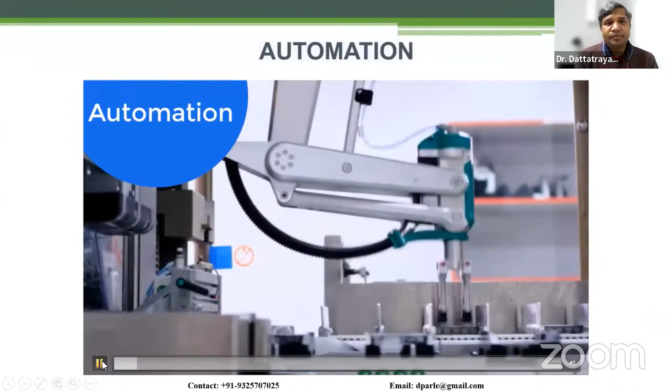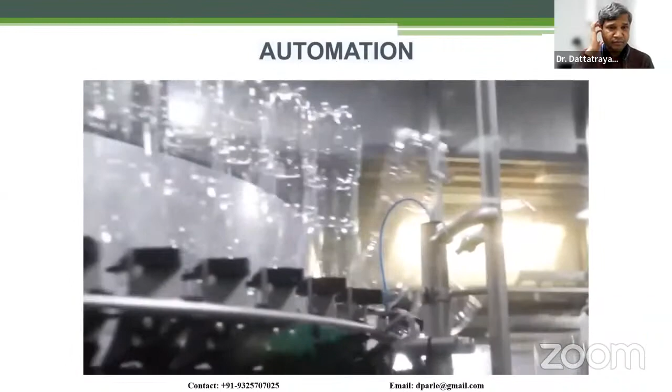These days, many industries are automated. Their whole process is working automatically with minimum human intervention, and in the days to come it will become more and more developed. Just take a Pepsi factory as an example. From preparing the compound or liquid to filling it in bottles and packing, every stage is automated. No need for humans to measure the quantity of liquid, capping and labeling the bottles, and counting the bottles. All tasks are done automatically. But how is it possible?

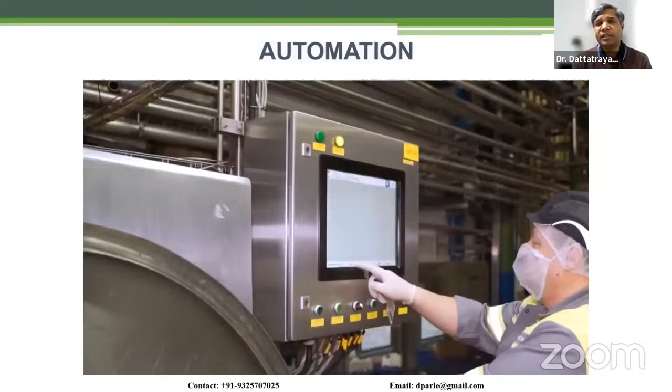So this is what we'll see - what is this automation, how it happens, how people do it, and how we did some of these automations. So what is automation? If you trace back the word, it's derived from the Greek 'automatos', meaning self-moving. Auto means self, matic means moving. So automation - if you have seen the earlier Pepsi factory example, I'll take you through another factory later.

And if you see some of those factories, they definitely use a lot of automation where the production is huge. So automation happens - maybe when you attended my Industry 4.0 session, I talked about Industry 2.0, where mass production, assembly line, that was more of a mechanical automation. Over the period of time, in Industry 3.0, electronics and computers started coming into the picture. That's where automation is the use of technology and machines to perform tasks or processes without human intervention.

So that's where automation started growing a lot in the era of Industry 3.0. In Industry 2.0, it was not that way, because the electronics technology part was not that predominant, so whatever automation could be done was using mechanical systems. If you remember, even today in India, in some places you will see that water level tank - it is operated using a mechanical control system. A ball is there, and as water fills up, it all cuts off, right? So that kind of automation was very predominant in Industry 2.0, but in Industry 3.0, the automation which combines technology and machines together started coming into the picture, and that's what we are going to talk about today.

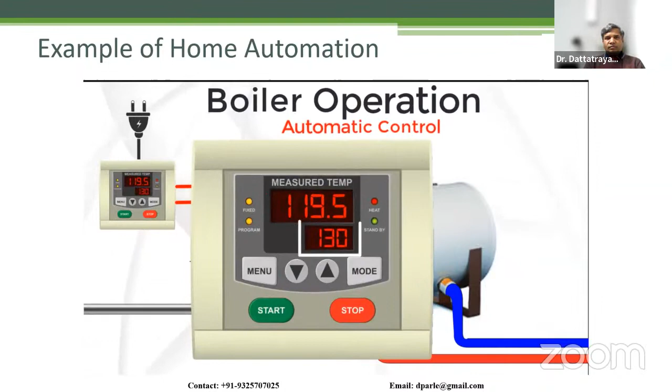Now see automatic control - the temperature gauge is replaced with a temperature transducer, the handle valve is replaced with a control valve, and the human is replaced with a temperature controller. Yes, the human is replaced with a temperature controller, and they are all connected through wire and power supply. The required temperature is already set at the temperature controller - that's called SV, meaning set value - and the temperature transducer sends a signal of current temperature, called PV, meaning process value. When PV reaches the SV value, a signal transmits to the control valve, and the valve closes automatically. So the same action has been done without humans.

So the human is in a safe place, there's no chance of errors, the temperature will be accurate, and it can handle a large number of valves. In UK homes, boilers of this kind are almost in every home because the outside temperature is very, very cold, and every home will always have two taps, hot and cold - and you always need hot water, because at least in winter you can't use cold water. So that is the situation where you use this kind of automatic control or home automation system.

Just look at a boiler - so what are the types of automation, and where are they used in the industry? There are types according to the kind of features they implement, and types according to where they are used. As per application: industrial automation, service automation, home automation, business process automation, transport automation, hospital automation, or logistic automation - there can be many types based on application. But typically, based on functions and features, it can be fixed automation, programmable automation, flexible automation, robotic automation, cognitive automation, and autonomous automation.

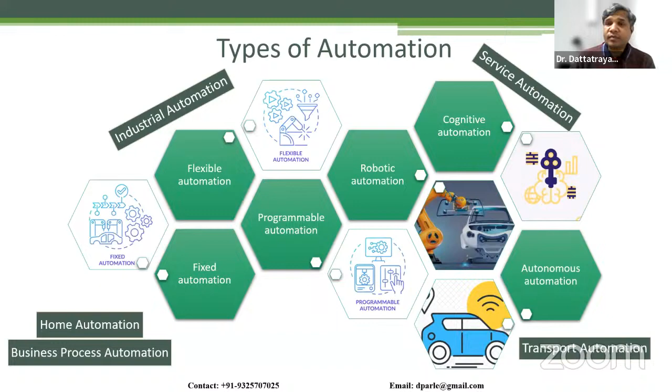As basic, it can be a fixed automation, one end, and another end, that's autonomous automation. So boiler is a fixed automation, or it can be converted into a programmable automation. Or the autonomous vehicle I explained on Monday is a state-of-the-art, complex transport automation. That autonomous automation need not always be in transport. There can be many autonomous operations in industry or any other field. When in a traditional automation you embed cognitive features and combine together these basic automations, either fixed or programmable, it will lead to autonomous, or doing it more autonomously as if a human is doing it. So let's see each one of it.

Before going into these details, I want to take you through one of the most state-of-the-art automated factories which I have visited. This video is from SKF India, Bangalore, but in 2017 I was in Germany and had a chance to visit SKF because we were working for them designing bearings. I also had a chance to visit this Bangalore factory. When I first visited the German factory, I realized the level of automation they use and why they use it. It is amazing to see. So I'll just play this video and then give more insight into it.

SKF Bengaluru to reach its goal of 0 defects.

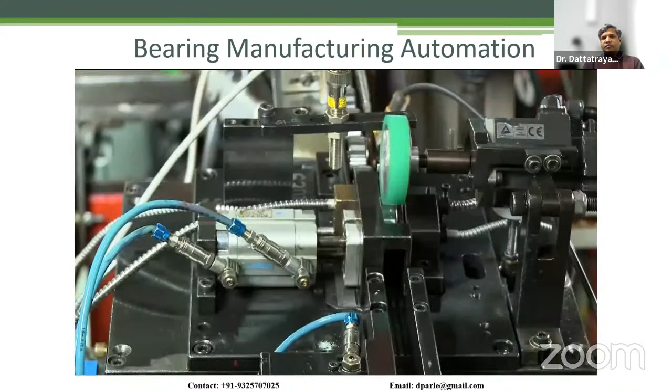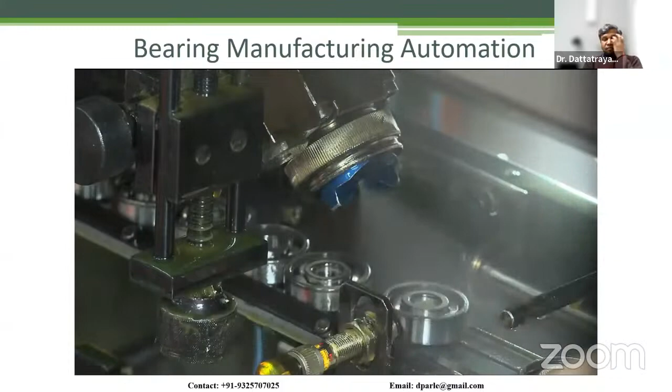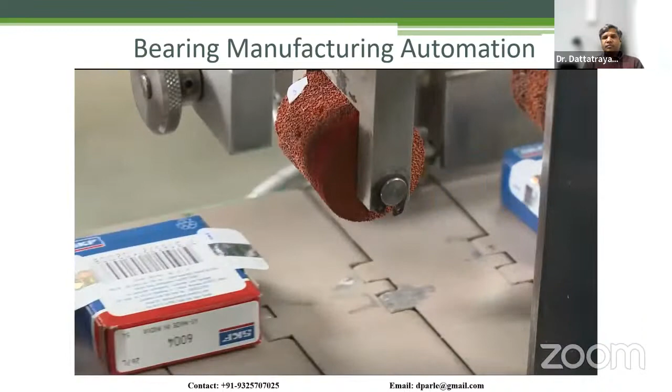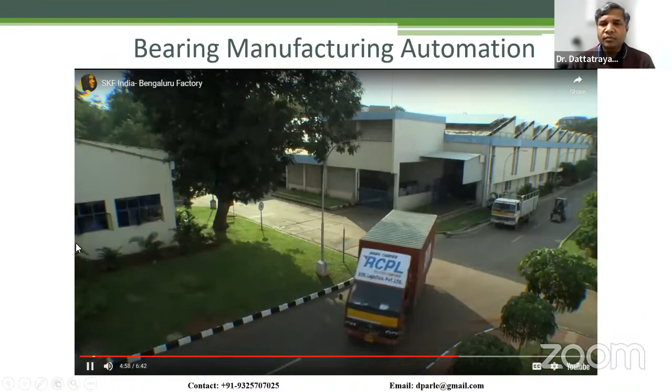The enterprise resource planning - so you can see the kind of automation they use.

So I have seen the factory, and you have seen the shop floor. Very few people would be there. In this video you can see a few more, but back in Germany, on one shop floor we had only a couple of guys who were just monitoring the machines or checking if something was going wrong. So from start to finish until packaging, everything is automated - assembly, greasing, packing in plastic, packing in boxes, packing in the big boxes. Everything is probably automated. It's amazing.

If you get a chance to visit, if you are in Pune, there's a similar automation factory there too. It's definitely worth seeing and understanding the kind of automation they do, the precision and accuracy, even their measurements and inspections - all activities are automated throughout. Only people are there to monitor the machines, monitor the settings, monitor if there's any problem in the line. The operators are not really doing any manufacturing-related activities, only inspection, monitoring, and surveillance. That's the kind of automation you will see in the industry - amazing to see and understand.

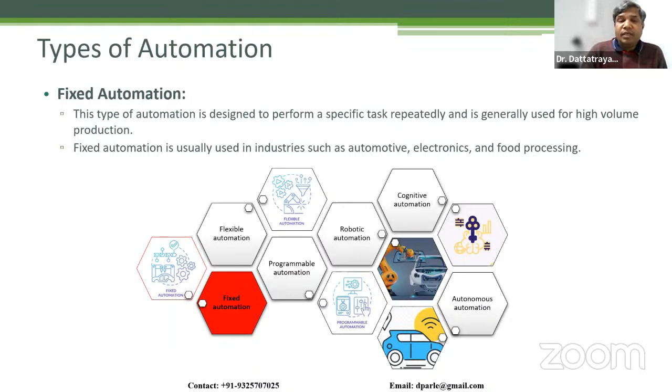Then there is a next level of automation. These are fundamental automations typically widely used in any industry.

That is where you will see programmable automation, which you can program or reprogram for a different purpose, not just fixed automation. The problem is if there is a slight variation in the product or operation, you can't use fixed automation; you'd have to build another one. But in programmable automation, you can do multiple tasks by reprogramming it. This is generally seen in manufacturing factories where tasks are frequently changed, so they set up automation that allows them to program and perform different tasks.

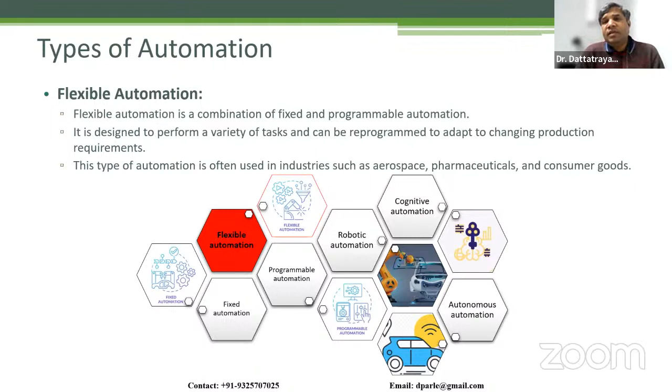The third fundamental automation is flexible automation, a combination of fixed and programmable. It is designed to perform a variety of tasks that can be reprogrammed or adapted to changing conditions or requirements. For example, if the diameter or height changes, it adapts to the changing requirements or task, and if the flow of operation changes, it can be reprogrammed. These are widely used in pharmaceutical, consumer goods, and many aerospace activities.

So fixed automation was definitely part of Industry 2.0, while programmable and flexible automation started coming into the early days of Industry 3.0. As Industry 3.0 matured with more use of computers, robotics, and electronic systems, robotic automation came into the picture.

Robotic automation involves the use of robots to perform various tasks that are either too dangerous or too repetitive for humans. For example, bearing manufacturing is very repetitive, maybe not too dangerous. But there can be too dangerous activities too, like heating of the bearing material, which is dangerous, or welding kind of operations, which are also dangerous.

So those kinds of operations are where robotic automation is certainly useful, or where it's highly repetitive. It can be used in a variety of applications like manufacturing, healthcare, logistics, everywhere. In logistics, definitely robots are used—you might have heard stories, and I've seen this myself, in Amazon warehouses.

Here is another example from our own factory. We call that factory 2050, which is part of our AMRC, one of the research centers - another branch, a manufacturing research center. It is completely highly robotic, everything is robotic, and we call it factory 2050, meaning probably the factories of 2050 would be completely robotic. And what should be done for that?

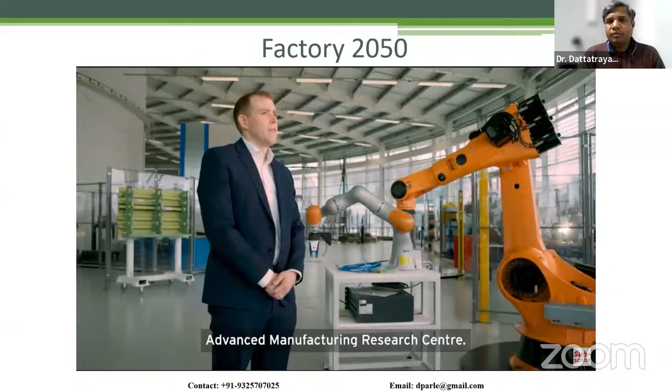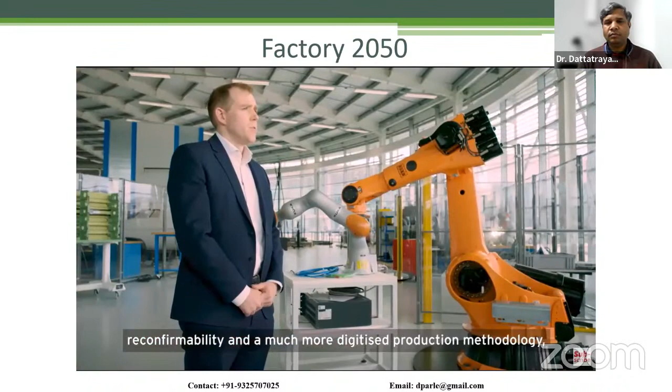I'm Ben Morgan, and I'm the Research Director at the Advanced Manufacturing Research Centre. Our directors back in 2013, 2014 were involved in a report for the government to understand what the future need for manufacturing was in the UK. The report concluded that there was a need for skills and to attract the right talent into the industry, and that manufacturing was heading towards a need for reconfigurability and a much more digitised production methodology. So Factory 2050 was really born out of that.

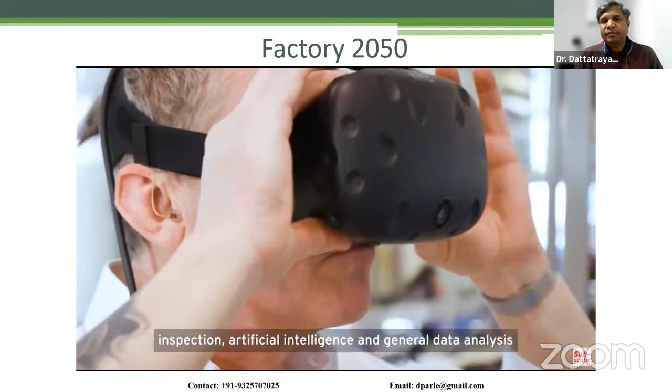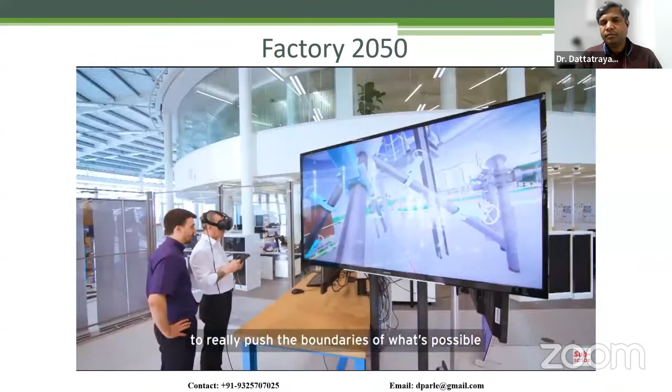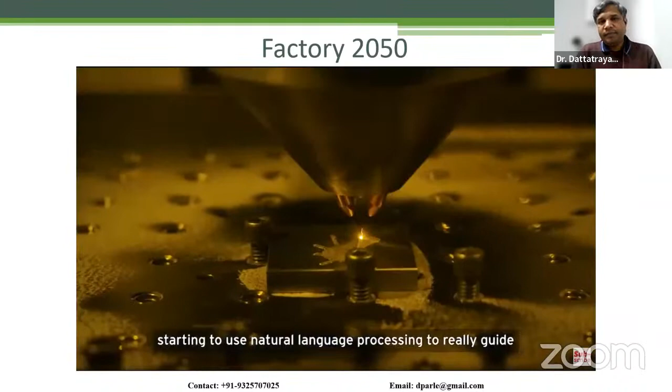One example of that is quality inspection, where we're starting to get figures back showing that AI is actually more responsive and more accurate than the human operator. You can see collaborative robotics, another application in maintenance, where we're starting to use natural language processing to really guide and aid the operator in their use of digital technologies.

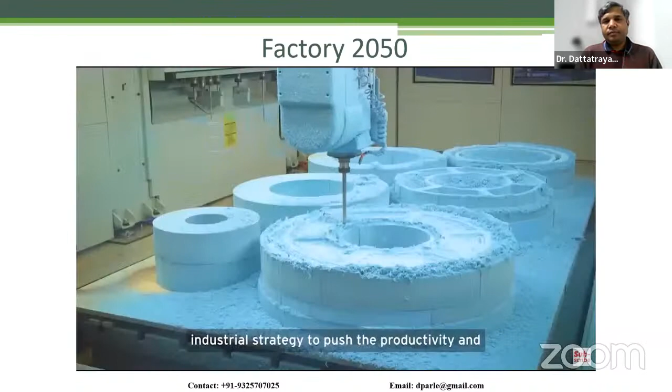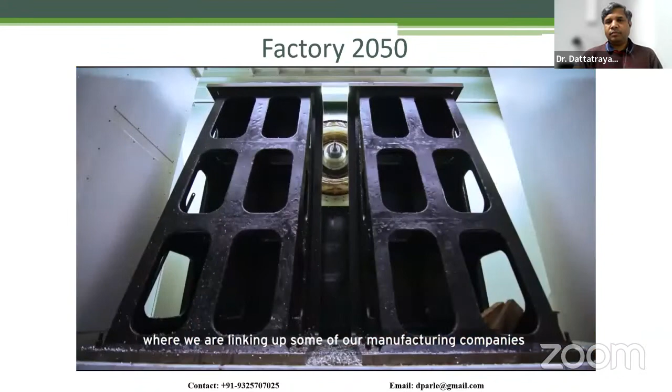There's been a huge drive by the UK government with industrial strategy to push the productivity and prosperity of the UK economy through manufacturing, and I think Factory 2050 has been a flagship in showing to the UK and the wider world what digital manufacturing can do. I think the next exciting thing for Factory 2050 is some of the work we're doing around digital meets manufacturing, where we are linking up some of our manufacturing companies and partners with small digital businesses in the region and nationally. What we're seeing is some of those smaller businesses have solutions and can act very, very quickly and solve some of our manufacturers' issues. I think that will be revolutionary for the UK going forward.

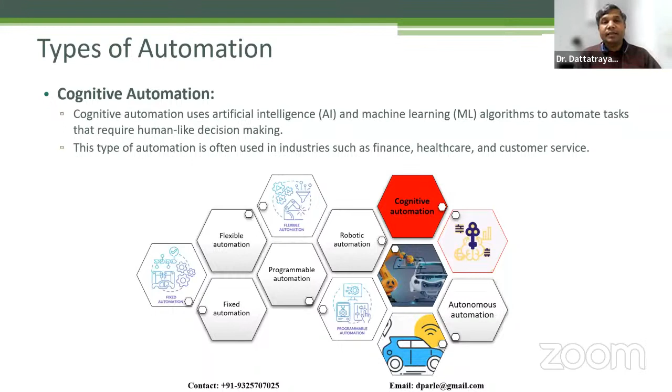So that's our Factory 2050, and it's completely robotic automation, probably augmented with cognitive automation. So what's cognitive automation? It uses AI and machine learning - I'll talk in detail a bit later about what AI is, what machine learning is, what deep learning is - to automate tasks that require human-like decision making. Rule-based automation is probably not cognitive, it's flexible but fixed and programmable - it's rule-based. A lot of robotics is also rule-based: you define certain rules to perform a task and it will do the task. But many tasks need human-like decision making, human-like reasoning, and that will come from artificial intelligence. And that is growing slowly.

This kind of cognitive automation, although growing in the factory and hardware side, is very popular today on the software side too, in many companies' IT departments like finance, healthcare, and customer service. You might have seen that when you go to a company's website, a chatbot appears - that's a type of automation for customer service. Or on finance websites, they tell you what your credit score should be, or which policy you should buy. All of that comes from cognitive automation, and you might see similar things on social platform companies. This is now being combined into our industrial or home automation, or factory level automation, to get better benefits.

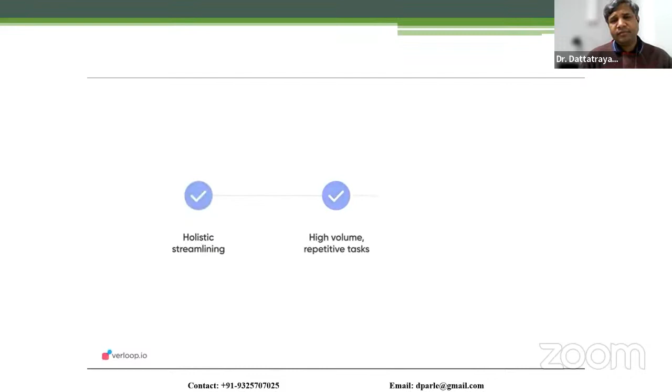So this is what I call a robotic cognitive automation program. What is intelligent automation? Simplicity is complexity resolved. Intelligent automation stands as a newfound way for you to streamline and optimize processes at different levels of your business through automation and cognitive capabilities. It is a three-way framework of technologies that bring high mobility and unison across teams: robotic process automation, business process automation, and artificial intelligence.

Robotic process automation allows you to emulate the way people perform back-end, high-volume processes, all through a set of defined instructions. These rules help the bot perform repetitive and time-consuming functions on its own. A few examples would be creating accounts, modifying customer information, automating customer refunds, and processing feedback and complaints. What's more interesting is that you can teach your task-based RPA system to correct or adapt its course based on its performance and dynamic conditions in the shortest time possible. This is truly what businesses such as yours can benefit from: accelerated efficiencies.

Business process automation, on the other hand, looks at a much larger picture. Imagine a company with process gaps across departments impeding it from performing to its full potential. There is a discord between worker onboarding, invoicing, supply chain, and retail. All of these departments are standalone but highly impacted by the way others function. BPA works at filling those process silos to form a coherent and sustainable business network.

RPA and BPA form the backbone of automation, but they are not cognitive - artificial intelligence is. It is the third component of what really makes automation intelligent and perceptive. With the help of machine learning and neural networks, AI decodes patterns and draws meaningful conclusions out of unstructured data. It is self-improving and requires minimal human support. With continuous training and deductive reasoning, it is able to evolve to become more human after each application. For example, with the help of sentiment analysis and natural language processing and understanding, conversational AI is able to pick up on the intent, tone, emotion, and even urgency to enable human-like customer support conversations.

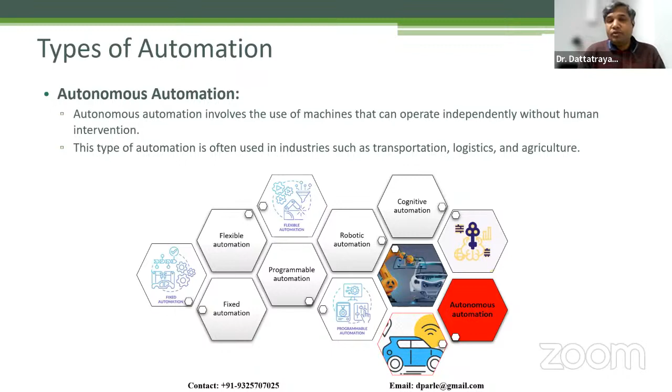Here is one example I was working on when I was at Wipro, collaborating with this company to help them with an autonomous vehicle. This is an autonomous vacuum cleaner. You might have seen people doing vacuuming manually, but imagine large spaces you want to do continuously, or countries like US, UK, or European countries where manpower is not there and is costlier than machines. In those situations, probably these kinds of autonomous intelligent machines would be useful.

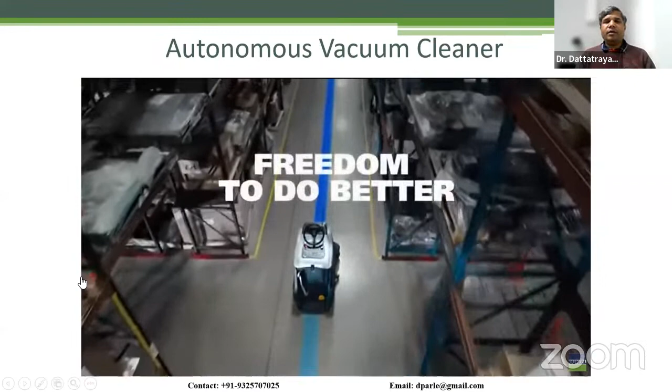So that is a kind of automation happening across the industries. There are different levels of automation happening. Just briefly, what is industrial automation? We already talked about what automation is - it's the same, but specific to the industrial application. It uses hardware and software control system devices or robots to operate or work in industrial processes, industrial setup, industrial operations, without a human operator.

So, benefits - some of this you already heard. Just to recap: it reduces cost, enhances quality, gives accurate results repeatably. Its communication is better, faster. You can do equipment monitoring. You can increase productivity. You can increase safety. You can have better working conditions, do predictive maintenance, corrective maintenance. You can trace back your production. Many benefits of automation over traditional manufacturing or traditional industrial operations.

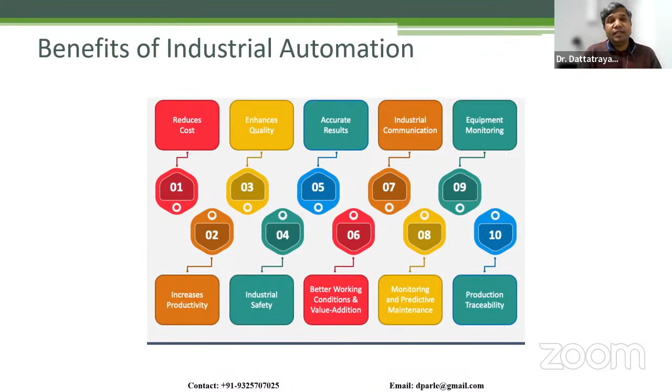So how are these automation systems built, what standard is typically used? ISA, International Society of Automation 95, is the standard used, which defines the fundamental hierarchical model for building automation systems or integrating enterprise and control systems. There are two things in automation: hardware, software, and your company, your process. That control system is connected to the enterprise system, and how it should be done - the guidelines are defined in ISA 95, and that helps people design the whole communication, and various models are given in the standard.

I'm going to explain here only the fundamental model and how it has now evolved in the changing world. It's a layered, pyramid-level, layered technology or business process model. It can be a functional model, it can be a technology model. I'll briefly explain this, and then you can refer to the ISA standard for more detailed understanding. So what exactly is the automation pyramid? It's a pictorial example of the different levels of automation.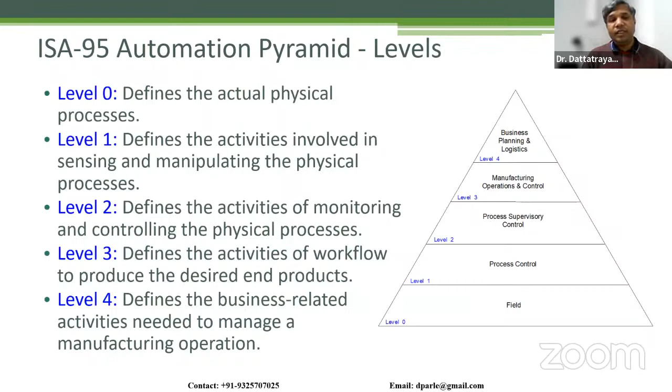So there are 5 levels of automation. Level 0 is the field level, where the actual process is happening. Level 1 is the process level, where you have to do sensing or manipulating of the physical process. Level 2 is controlling and supervising - the supervisory level, where you want to control, supervise, and monitor the activities. Level 3 involves defining workflows of activities to produce the desired results. Level 4 is the management business layer.

So this is briefly explained here.

These are the devices, actuators, and sensors that you see in the field or on the production floor. If you think of it this way, the field level is the production floor that does the physical work and monitoring - electric motors, hydraulic and pneumatic actuators to move machinery, proximity switches used to detect that movement or certain materials, and photoelectric switches that detect similar things, will all play a part in the field level.

The next level is referred to as the control level. This is where PLCs and PIDs come into play. The control level uses these devices to control and run the devices in the field level that actually do the physical work. They take in information from all of the sensors, switches, and other input devices to make decisions on what outputs to turn on to complete the programmed task.

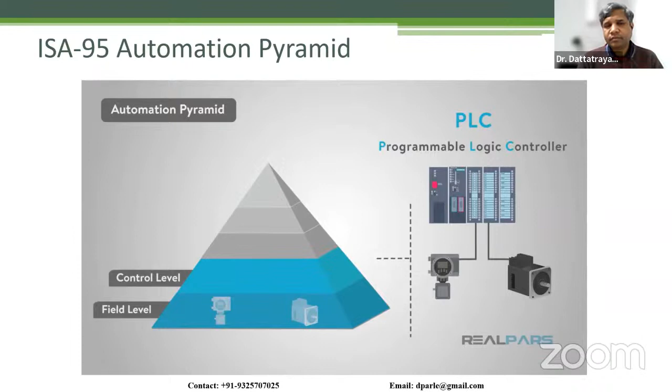A PID is usually integrated into the PLC and stands for proportional integral derivative. It's a controller that can keep a variable within a set of parameters.

A common example that you probably use every day is your cruise control. You set your cruise control to whatever speed you want, and the PID sensors and controller, the computer in the car, will tell it when to accelerate or decelerate according to the set speed.

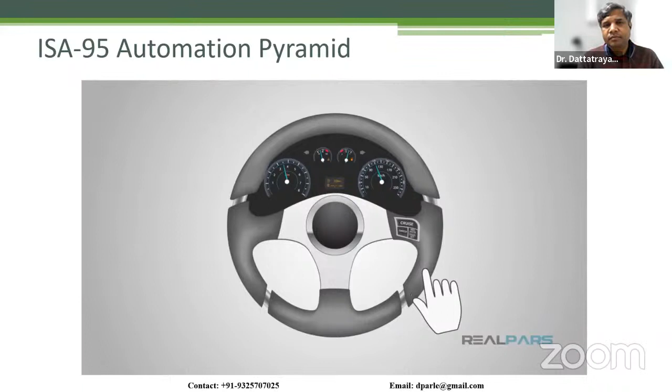A common industrial PID controlled item is a heater. Many systems in manufacturing plants have to be heated. We control this with a PID block within the PLC. When a set point is entered, the PID will determine when the PLC needs to turn the heater on and off to maintain a constant temperature.

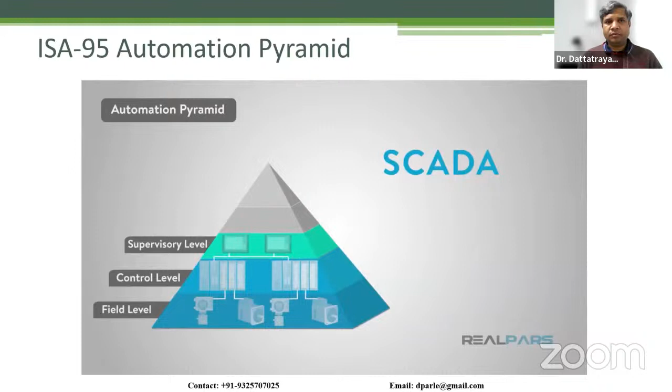The third level of the automation pyramid is known as the supervisory level. Where the previous level utilizes PLCs, this level utilizes SCADA, short for Supervisory Control and Data Acquisition. SCADA is essentially the combination of the previous levels used to access data and control systems from a single location. Plus, it usually adds a graphical user interface, or an HMI, to control functions remotely.

Water plants will often employ this technology to control remote water pumps in their systems. The important thing to remember about SCADA is that it can monitor and control multiple systems from a single location. It isn't limited to a single machine like HMIs that we've discussed in previous videos.

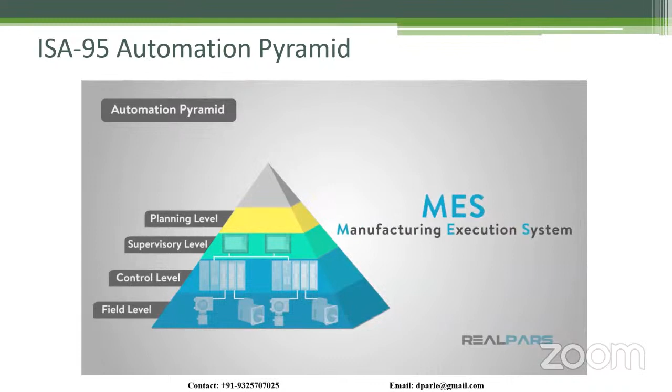The fourth level of the automation pyramid is called the planning level. This level utilizes a computer management system known as MES, or Manufacturing Execution System. MES monitors the entire manufacturing process in a plant or factory from the raw material to the finished product. This allows management to see exactly what is happening and allows them to make decisions based on that information. They can adjust raw material orders or shipment plans based on real data received from the systems we talked about earlier.

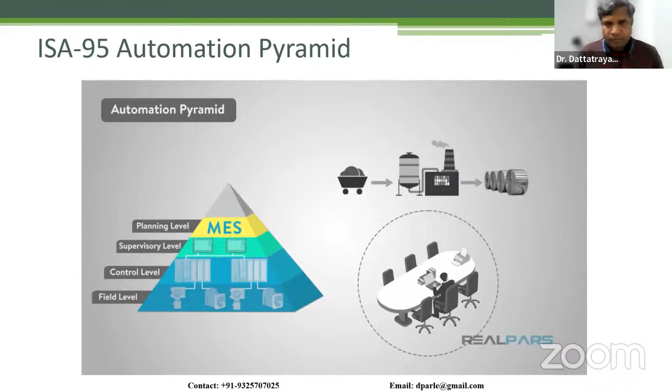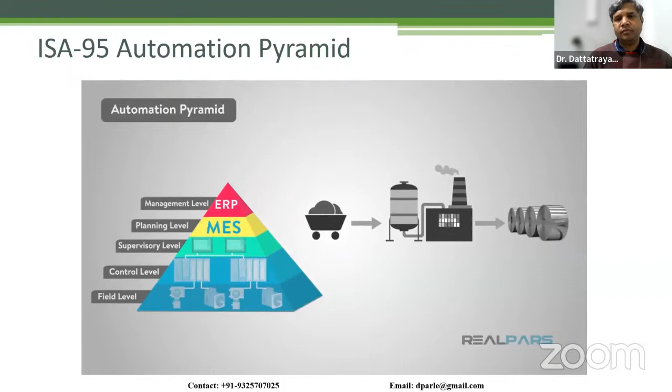The top of the pyramid is what is called the management level. This level uses the company's integrated management system, known as the ERP, or Enterprise Resource Planning. This is where a company's top management can see and control their operations. ERP is usually a suite of different computer applications that can see everything going on inside a company.

It utilizes all of the previous levels of technology, plus some more software, to accomplish this level of integration. This allows the business to monitor all levels of the business, from manufacturing to sales to purchasing to finance and payroll, plus many others. The integration of the ERP promotes efficiency and transparency within a company by keeping everyone on the same page.

So that's the pyramid automation architecture advocated by ISA 95, which is similar to what I talked about in my second talk on digital twin. I said digital twins are built on Industry 4.0 architecture, and you see there's a physical layer, communication layer, platform layer, and application layer.

But the way it probably works is slightly different than ISA 95. By recognizing this need, ISA needed to be upgraded because PLC, SCADA, and DCS are now kind of old legacy systems, with changing technologies and IoT systems coming into the picture. Probably it's not going to work the same way.

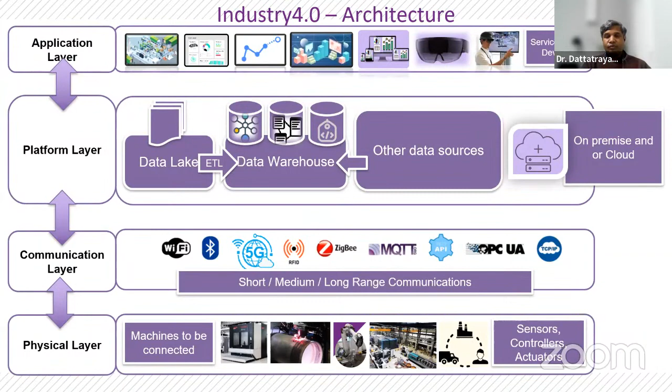So ISA has evolved the model now, and the old hierarchical architecture is being converted or promoted as a new network architecture model to address some of the needs of Industry 4.0, to embed Industry 4.0 architecture, technologies, or systems into it.

So ISA is now upgrading their standard for smart manufacturing, smart MES, or smart MOM operations or implementations. It is now advocating or suggesting adoption of this new network architecture, which has all connected devices, all kinds of data processing layers, all interconnected systems, and possibly AI systems. So it will try to fulfill the standard needs of factories adopting Industry 4.0 and automation.

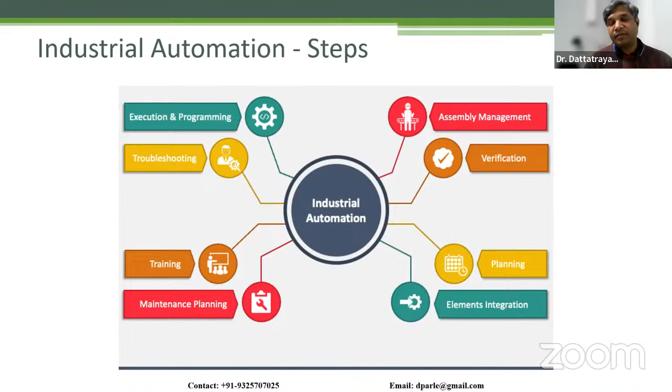So one example, from very early days of industrial automation which I worked on, is a real-time seam tracking system for automated fusion arc welding. That was a kind of setup. When I was doing my master's in IIT Bombay, as I said earlier, I had since beginning very much interest in emerging technologies, and even during that time in '99...

Although I was a mechanical engineering student, my BTech project was in software. I implemented a quality control system, developed software for quality control using X-bar chart, P-chart, R-chart. I don't even remember the names now - what those quality control charts are.

So then when I went to IIT Bombay for my master's, MTech, I got another opportunity to do this automated welding. We had this welding machine - let's say we want to join two parts, two parts like this. Now typically the welding operator will look at the seam and the weld, right?

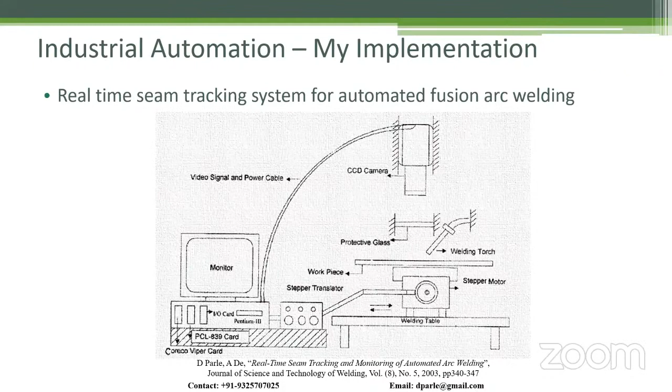Where the welding should take place - so if the torch is offset from the joint location, it will automatically shift the plate using the control system, stepper motor control system. We had this PCL card within which the program was written, and control actions were sent based on the image processing we do to identify the system.

So this is what the whole process was. You get the CCD camera, initiate the stepper motor control system, set up the welding parameters, apply the welding, start the welding by putting the plate - it will process the images and identify the weld tip, identify the joint location, and then identify what is the gap - whether the center of the weld tip is at the center of the joint or not.

If not, the stepper motor control will move this table in X and Y direction. One direction continuously moves the seam ahead, and the other direction tries to keep the torch at the center of the seam - even if it is inclined or circular, it will still do it. So we performed several experiments. You can read the paper - I have given the details of the paper, and you can read that.

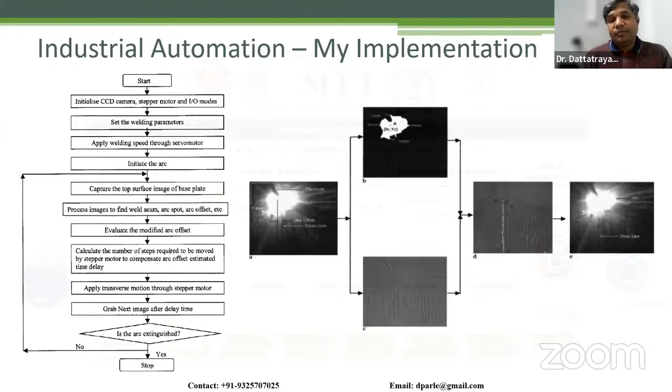This was a kind of industrial automation we did early days, and that was one of the experiences. Then I did that robotic platform which I talked about Monday, in robotic automation, lot of autonomous kind of automations at Bhabha Atomic Research Center. I just did not want to repeat that, so I did not bring that here today.

So if you remember, on the first day during introduction, I talked about some of my skills. I said I'm a core mechanical engineer. I did a lot of work in CAD, CAM, CAE, and then I also worked in software development. So one of the work which I predominantly do is known as knowledge-based engineering. So what is this knowledge-based engineering?

If you see here, it says automation and scripting for various tasks. It was on the software side, automation for these core softwares, in the designing phase of the product. The automation we are talking about until now is automation at the factory level, manufacturing operation level. But before manufacturing, the product is designed, and the product design itself is very complex. Think like aircraft systems or automotive systems, they are very, very complex. So for designing using CAD, CAM, CAE, we used to do a lot of automation.

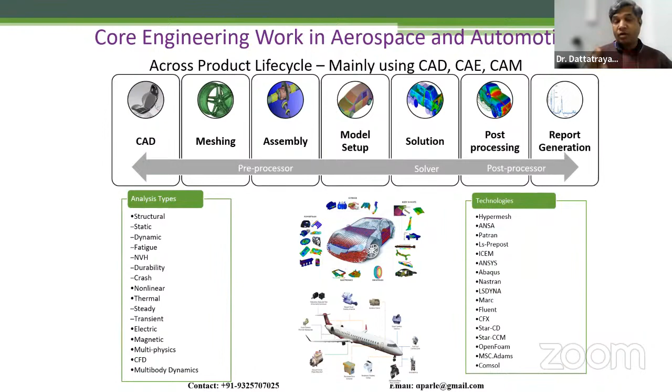Every time you want to do the CAD modeling, every time you want to do the simulation, every kind of CAM simulation for the similar kind of product, it is very time consuming and repetitive in nature. So how do you save that effort? How do you do the task faster? To do that, you can automate many of these tasks. Apart from traditional simulation, I did a lot of medical device simulation also, and used automation in design development of medical devices too.

So what is this knowledge-based engineering framework or automation framework? What is our traditional design process? Concept, design, realize, sustenance. And if you see traditionally, let's say it takes 100 hours. Now with knowledge-based engineering, if you embed that knowledge of automation and scripting and apply it to the repetitive CAD modeling, repetitive FEA, CFD simulations, or repetitive manufacturing simulations, then it is observed that you can reduce almost 80% of the efforts. So overall savings can be 20 to 40% definitely there.

So from the traditional 80 hours of routine task, out of 100 hours, that can be brought down to 20, 30 hours. So you save 50, 60 hours per task, and that is huge, around 80%. And then you get more time for your creative thinking. That helps you to reduce the cycle time, effort reduction, streamline automated processes, consistent and standardized designs, reduce person dependencies, quality improvement, similar to the automation benefits you had earlier.

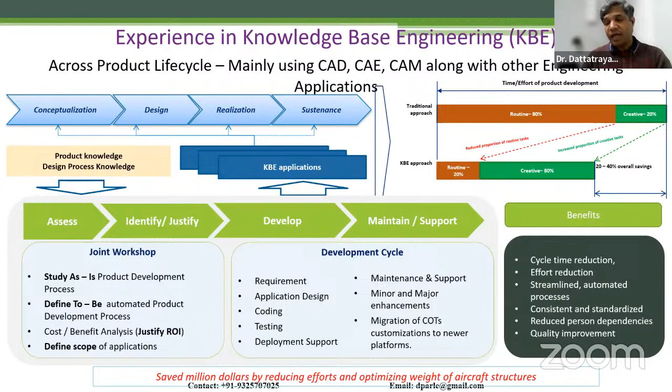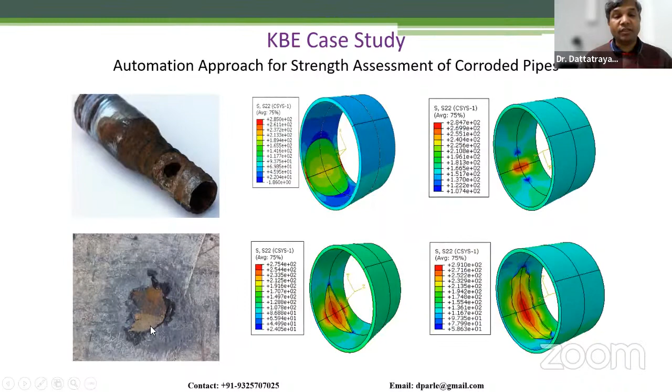We were doing this kind of design for many others. In a corrosion analysis of a pipe, we use the same approach. Creating the actual profile of the corrosion was a tedious and difficult process to do manually. So what we did is we captured the rule, defined the rule in the program, and now using this knowledge-based engineering or automation scripting, it is done very efficiently and effectively, which can quickly help you generate the same thing. We applied this now in this.

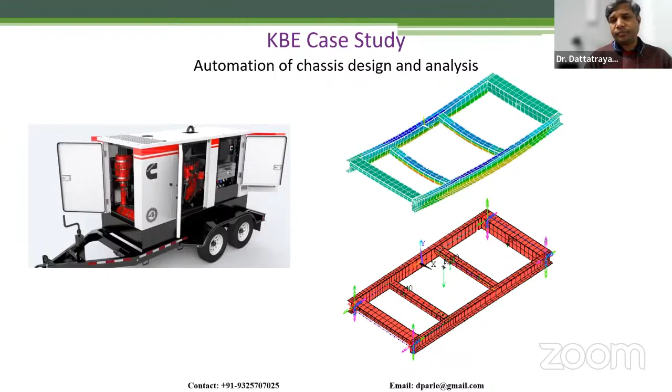This is a chassis design, in genset chassis design end to end, something similar to gear. I don't have the details of this because we did this in Infosys for a customer and the details are not with me. But it was like the user gives input and you get a design report created without any intermediate manual task. So that kind of automation we did for chassis design, so it will do the efficient chassis design.

So these are the other kind of automations which you will come across in the industry, more on the design side, software side automation. So I said one more automation which is very popular in IT side of industry is robotic process automation. Let's see what it is.

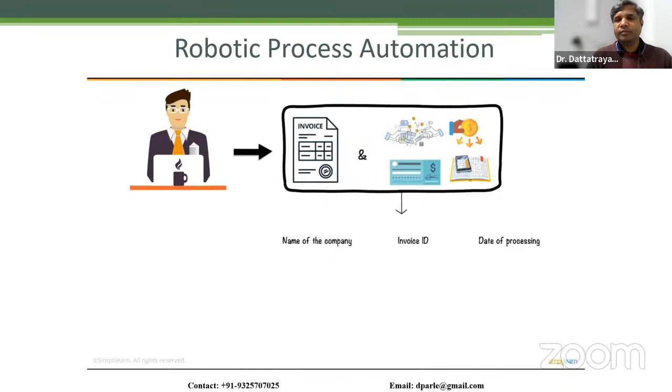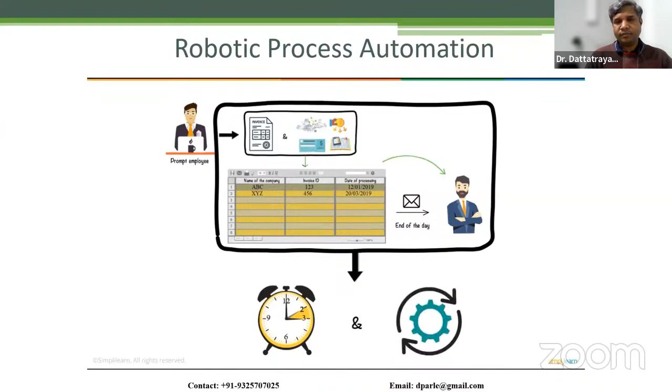This is Jim. He is an accountant in a multinational company. He handles several invoices and other financial records like monetary transactions, liabilities, checks, and ledgers on a daily basis. One of his tasks is to copy all the relevant information from these invoices, such as the name of the company, invoice ID, and date of processing, into a spreadsheet, and mail the sheet along with other financial reports to his superiors by the end of the day. As any prompt employee, he transfers all the information to the sheet, attaches the reports, and sends them over to his boss via email every day. But over a period, he starts finding this task to be time-consuming and repetitive. Frustrated, Jim looks for a way to reduce the time and effort it takes to complete the task.

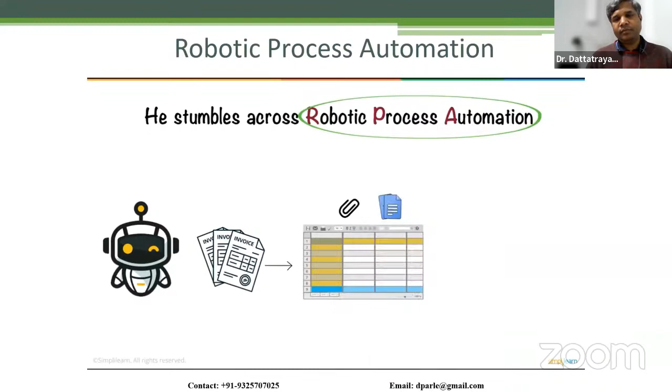And voila! He stumbles across robotic process automation, aka RPA. Using robotic process automation, he builds a simple bot that extracts information from several invoices into an Excel sheet, attaches all the necessary financial reports, and sends them over to his superiors via email at a specific time every day.

So what exactly is robotic process automation? Robotic process automation, RPA, is the use of software with artificial intelligence and machine learning capabilities to handle high-volume repetitive tasks that previously required humans to perform. Some of these tasks include addressing queries, making calculations, maintenance of records, and performing transactions.

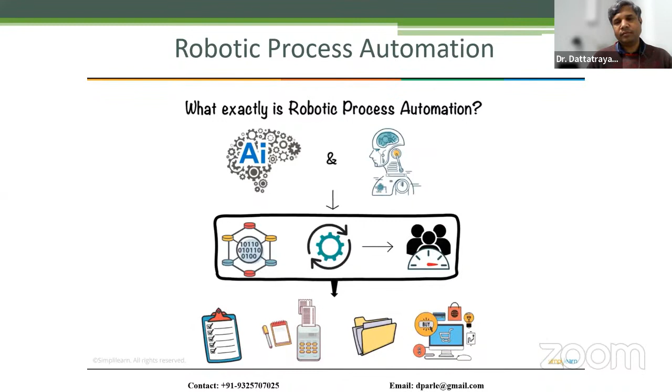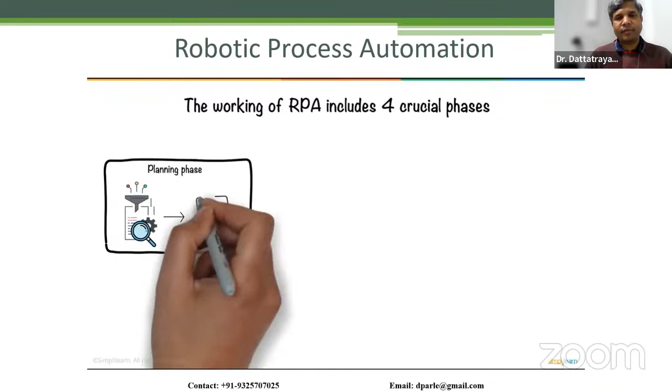The working of RPA includes 4 crucial phases. First, the planning phase typically involves gathering the processes to be automated, identifying the test objects, and finalizing the implementation approach. Second, the development phase includes the creation of automation workflows as per the agreed plan. Third, deployment and testing is a vital phase, since it uncovers any unexpected outages and ensures a bug-free product. Fourth, there's the support and maintenance phase, which ensures the product is continuously updated with smooth deployment across the user base. To meet the objectives of RPA, tools are used. These RPA tools are software applications that can configure tasks and automate them.

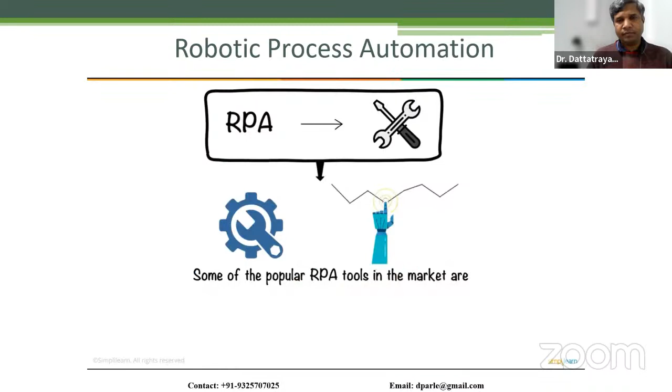Some of the popular RPA tools in the market are UiPath, Automation Anywhere, Blue Prism, WorkFusion, Pega, and Redwood, among others.

I write a blog. When I shifted to UK, let me quickly give a brief on how I use automation into this kind of robotic process automation.

When I used to write a blog in India, that was more for helping my daughter in her studies. When I shifted to UK, a lot of people started asking me how they could also look for jobs in UK. It was becoming very difficult to tell everyone on WhatsApp, phone calls, or different LinkedIn platforms.

So I thought I'll create some pages. If you see here, it's jobs in United Kingdom, and I started helping people with this. Initially, last year, almost a year now, I started this activity.

Initially every Saturday and Sunday, I used to sit, create, and extract the available jobs in UK universities, listing them on different pages of my blog. I used to create only 1 or 2 pages, and that used to take my whole weekend.

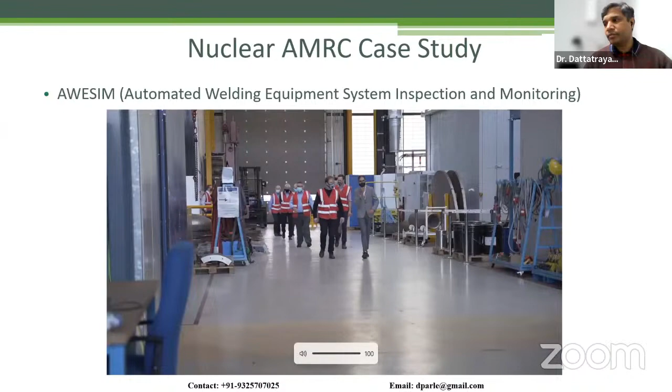We're here this afternoon to witness the final demonstration of the AWESIM technology, which is Automated Welding Equipment System Inspection and Monitoring Project. The purpose of the project is to develop a system for real-time weld process monitoring and associated near real-time, non-destructive examination of the weld as it is formed using phased array ultrasound.

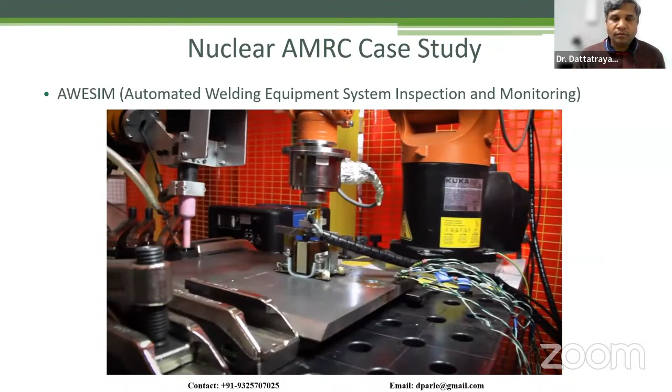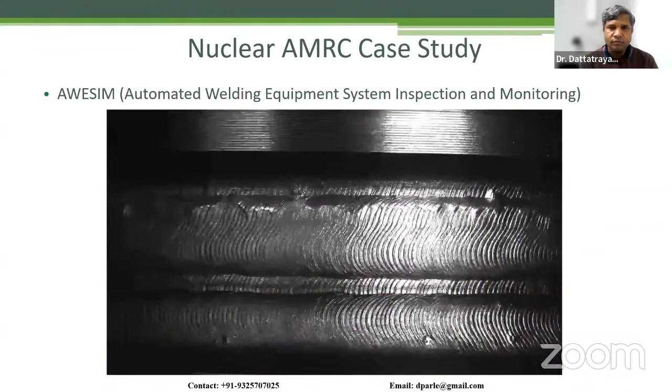The key successes for this project have been dealing with COVID, which we have done, but also dealing with the challenge of managing huge quantities of data and integrating that data together. Also, it's the real-time viewing of the data and being able to interpret it in a really easy way so that operators get that immediacy of feedback from the process, from the system.

This AWESIM project is going to change the way high integrity multi-pass welds are done throughout the world. AWESIM, in terms of inspection and welding, presents a massive opportunity for us to decouple traditional processes, by being able to inspect at temperature and have insight from welding sensor and data.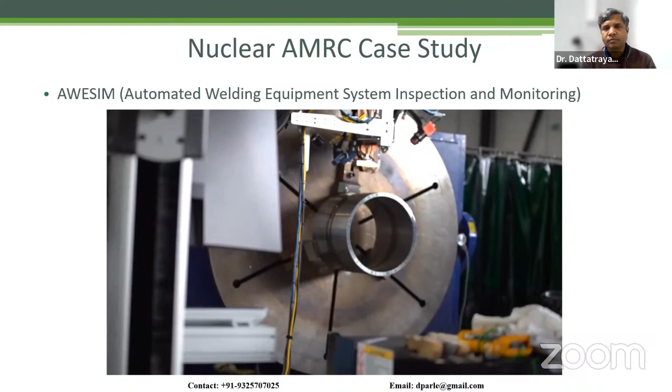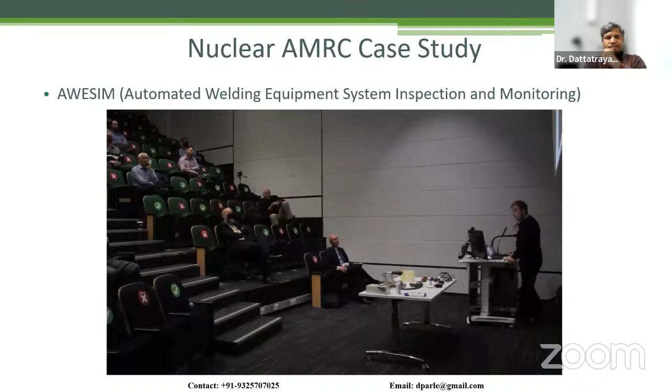The AWESIM programme for us has been a culmination of quite a few years of work, primarily sponsored through the Advanced Manufacturing and Materials programme through BEIS. Collaboration is key to ensuring the success of these projects, translating fundamental research through the technology readiness levels to industry - with industry leading the technical requirements, government support providing the necessary funding leverage, and academic teams engaging collaboratively with all those parties to deliver meaningful transformational change and impact on the shop floor.

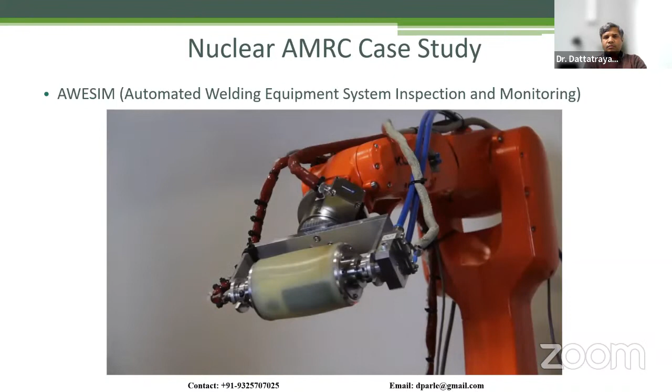What we're able to do here is, as we're welding and depositing the welds, we are actually testing, so we're getting very early indications of any defects. So if anything has gone wrong, we don't have to scrap the full component, we don't need to excavate a very large part - we can react very quickly.

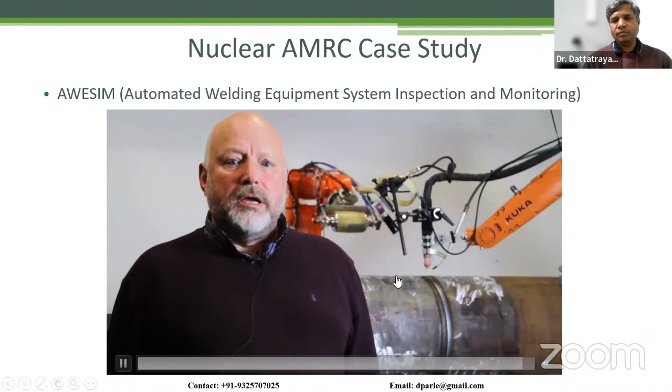So the time between defect formation and defect detection has been really shortened by this project. Any high integrity welding process will need to have the AWESIM system attached to it if you're going to competitively compete for work. In traditional welding, they use different sensors like laser sensor, camera sensor, ultrasound sensor, and were processing the data in more real time.

Now, how did we make it intelligent? When I joined, I tried doing it in a more intelligent way. So what we did is we built an artificial intelligence model. Traditionally, you could see the defect - a good weld needs cleaning, and a defective weld needs detection. The AI model is built and now integrated, and it's definitely more intelligent than earlier, which was more rule based. You process the data, define the rules for defect detection. Now it is more artificial intelligence, reasoning like a human, and then taking the action.

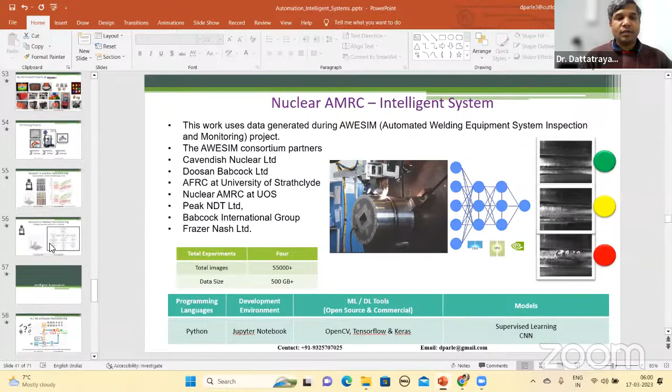So in the interest of time, I decided I'll briefly talk about what is AI and all, but probably we don't have that much time. I think we are almost done. So I hope maybe we can stop here and I can take questions if there are any.

So there is one question from Mr. Sonar. Sir, can you please suggest a computer-aided process plan, open source software, MRP, material requirements planning software.

There are many softwares, but if you want open source, I'm probably not aware. Okay, so maybe I'll try to find out. I'll just take note of this and pass this information to BC sir. But I don't remember, I don't know the open source software. There are many commercial softwares, but not definitely. Sorry for that inconvenience, but I'll pass on this information over the weekend to BC sir.

Any other question? If no question...